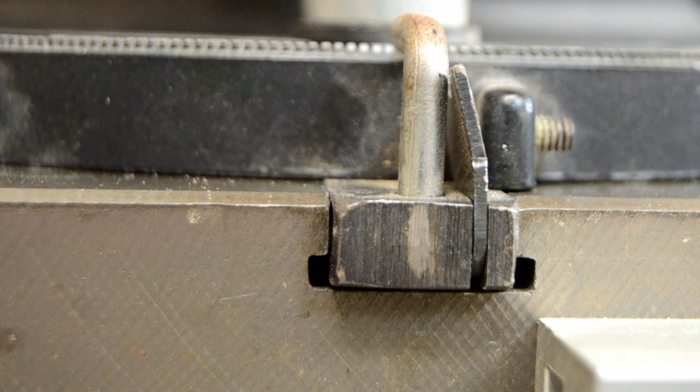Factory, aftermarket, or shop made, if your miter bar doesn't fit the slot properly, you simply can't get accurate results.

Much of the work here is going to be done on the bar, so the miter gauge has to be disassembled first. The locking handle is removed by simply unscrewing it completely, and then the T-slot retaining washer removed if your miter gauge has one.

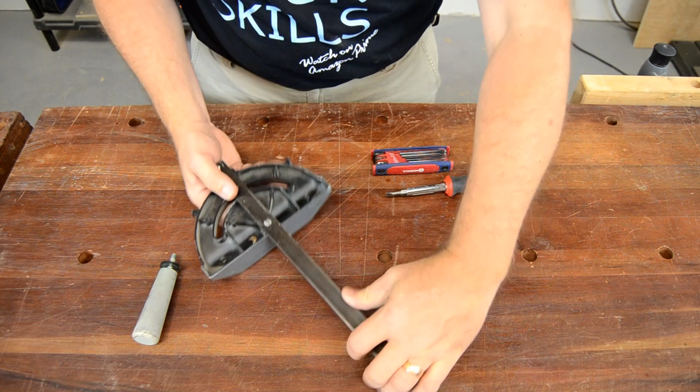Most gauges have some sort of flip stop for the preset angle cuts and a pointer to indicate the angle. They both need to be removed, and on mine, this is a single set screw for both.

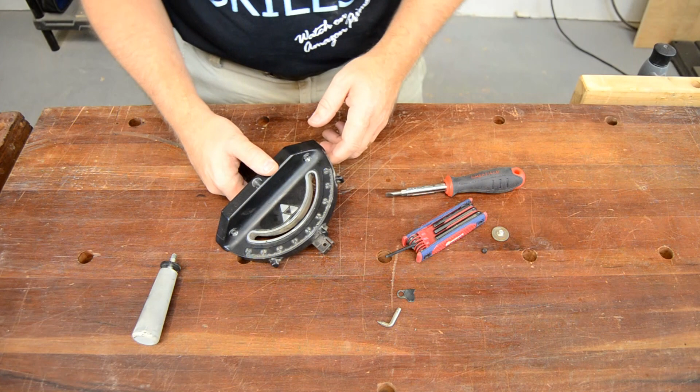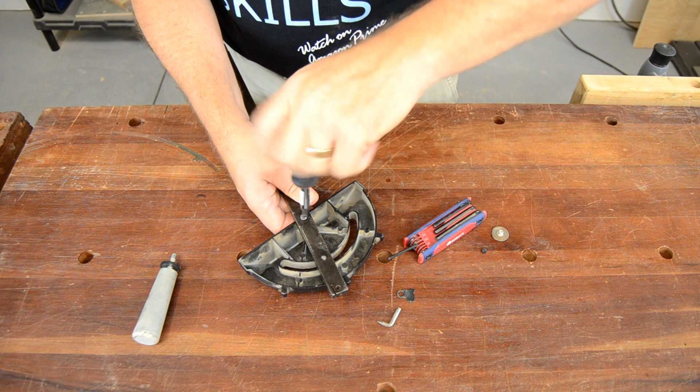The head of the miter gauge can now be removed. A shoulder bolt mounted to the bar acts as both the pivot point and to hold the head in place. But be careful here. Many miter gauges have a set screw in the face of the head to lock this shoulder bolt in place. The set screws used for the 90 and 45-degree presets are removed next.

Now any repairs can be completed. The flip stop for the preset angles usually gets pretty banged up.

I used one of my Bessey C-clamps as a press to flatten it out. And that worked perfectly well.

The bar and the head are both checked for damage. Any burrs or damage are filed out, and all of the parts get a thorough cleaning.

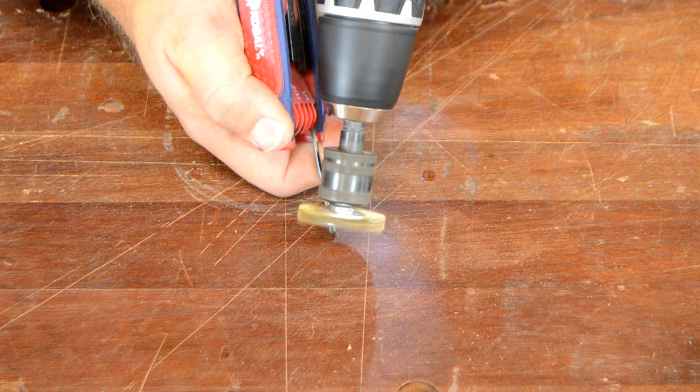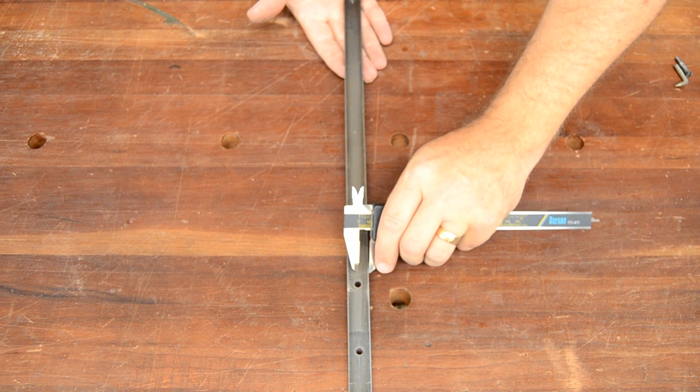The restored miter bar is measured for actual width. Then the caliper is set to exactly half that measurement and used to scribe a line down the center of the bar.

This line is then filled in using paint or a wax pencil, as I'm doing here. Then the surface of the bar is buffed, leaving a sharp, precise, and easily seen line right down the middle of the bar.

Now with our bar cleaned up, the center line marked, and everything still stripped off it, this is the time to adjust the bar to fit the miter slot.

You will see in some magazines and other online sources, they'll use a punch to hammer the edge of the bar to leave a little divot that can then be filed down until it fits. I don't like the idea of altering my bar, and then as that wears, and it will, you're going to have to keep doing it over and over again.

It's really not a permanent solution. So what we're going to do is actually drill through the bar and use some nylon set screws to adjust the width of the overall bar until we get a perfect fit in our miter slot.

For less than $30, I was able to buy a 10-32 tap, the proper drill bit that goes with that tap. They are matched, so you want to make sure you get the right size, and some nylon set screws, also 10-32. These are a little bit harder to find than metal set screws, but I do prefer them because they're less likely to scratch up the shoulders of my miter slot.

As they wear, and they will wear first, which is what we want, we can just readjust them. Now, we're going to drill all the way through the bar and tap all the way through the bar. This is a mild steel bar, so that's just fine. We can do that. But that allows me to use the set screws in the bar, reach in from the other side with an Allen wrench to adjust and not damage the Allen screw opening.

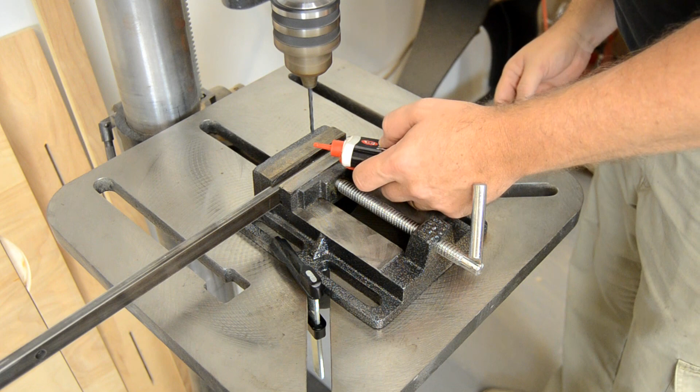Through holes are drilled first, and it's important that they're perpendicular to the bar. Ensure that your drill press table is set up properly. A drill press vise, like the Bessey unit I'm using here, is a big help. The bar will drill pretty easily, but take your time and let the bit do the work.

Clear the hole regularly to remove chips, and a few drops of oil in the hole will keep things lubricated and greatly extend your bit life.

Three holes should be drilled, one toward the front, one in the middle, and one toward the back. The exact locations are not really important. Just make sure that your new holes don't interfere with any of the existing holes in your miter bar. You do need to be a bit careful working around the chips and curls that come off of the bit. They are sharp.

Countersinking the holes will remove any burrs and make starting the tap a little bit easier.

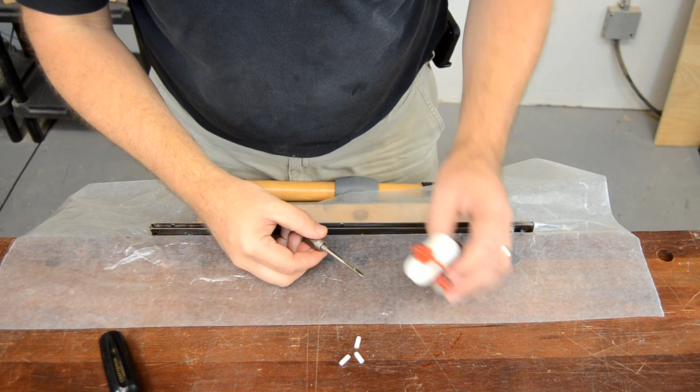The tap is mounted into a tap handle and a little bit of oil applied to the threads. The end of the tap is tapered to start cutting the threads gradually. Set the tap by hand, making sure that it's aligned with the hole.

Then gently turn the tap with a rod through the tap handle. The handle comes with a rod, but mine is missing, so I'm using a screwdriver. The tap is made from hardened steel, so it's hard enough to cut threads in the mild steel, but it's also brittle. Working it carefully will cut good threads without breaking the tap.

The proper technique is to turn the handle until the tap starts to bind. Then turn it backwards a partial revolution and reverse again to go back to cutting threads. And then, every several revolutions, back the tap out completely and clear the threads. Just take your time, keep things lubricated, and don't rush the process, and you'll get great results.

With the holes threaded, the set screws can be inserted. Thread them in until they're inside the bar. They'll be adjusted later.

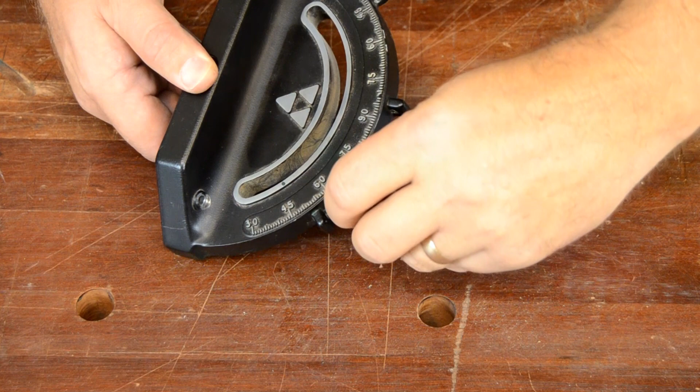The protractor head is reinstalled on the bar, and all of the other components added as well. Add the angle pointer, but don't lock it in place yet. The protractor head, pointer, flip stop, and the 3 set screws for the preset angles are all now installed.

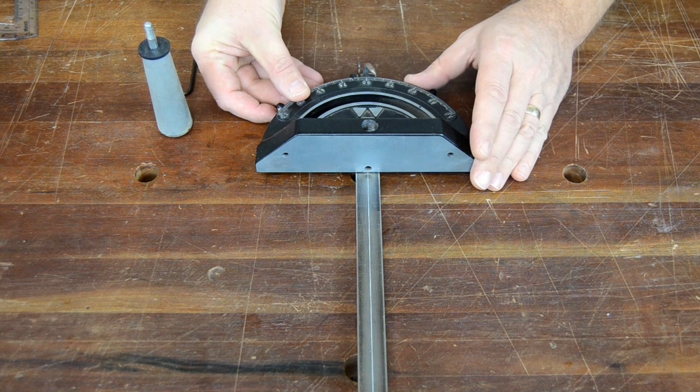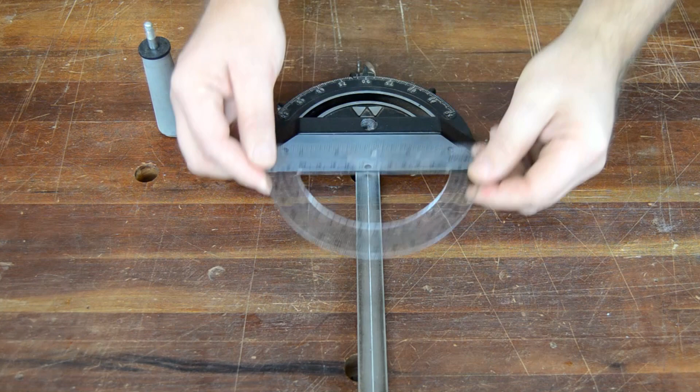But they have to be calibrated, and that's one of the reasons this line was established on the bar. A simple, clear plastic protractor from the office supply store can be lined up on the head and then adjusted until the center point on the flat bar is against the head and the white line is in the middle of that indicator.

Then the head can be adjusted until the 90-degree mark up here aligns with that line as well. Now the head is at 90 degrees to the bar. The handle can then be reset in place, locking the bar in.

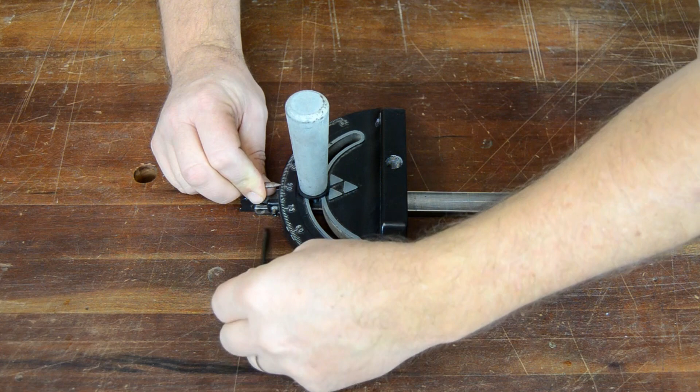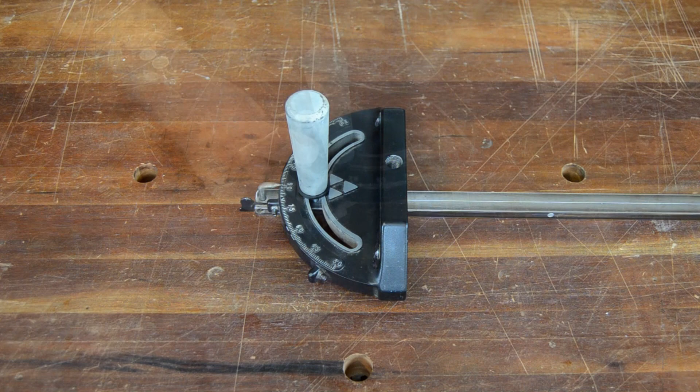The pointer is now adjusted to the scale on the protractor head and locked in place. And while it's at 90 degrees, the flip stop can be put into position.

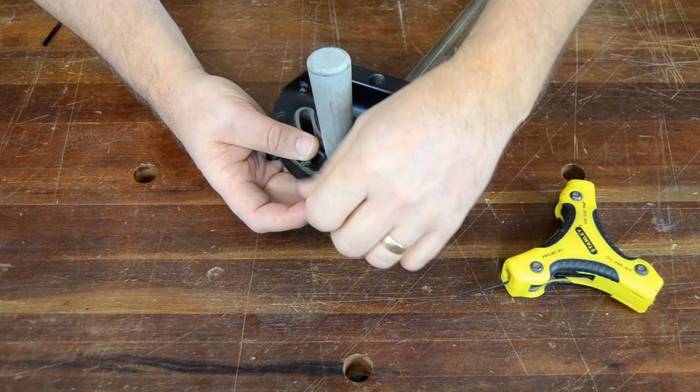And the set screw adjusted so that it's just touching the flip stop. It'll take a little bit of adjustment here to get it to the point where when you bring the head back to 90, it meets, but it's worth doing.

Once set up and calibrated, the flip stop is moved into position, the head brought back to the 90 position, when the two touch, and this can be verified using our protractor, and that looks good. So now it's really easy to return this protractor head back to 90 after making an angled cut.

And the stops for the 45-degree angles are done the same way. Using the protractor and the scribed line on the bar to set the 45, lock it in place, and then adjust the set screw.

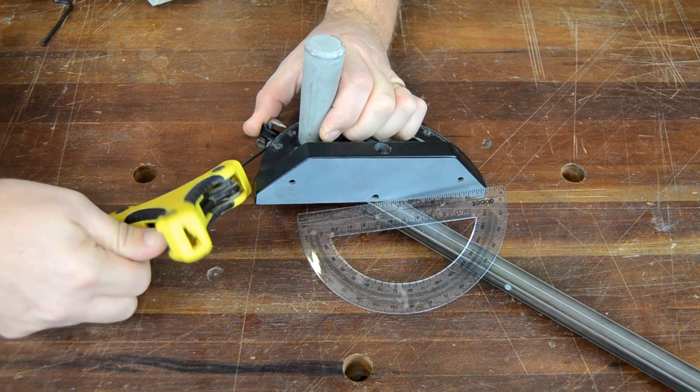The set screws are now adjusted to fit the bar to the miter slot. Adjust the set screws in sequence, front to back, so that each slides easily within the miter slot without any side-to-side play.

Your miter bar is now clean, tuned, and adjusted to provide accurate results.

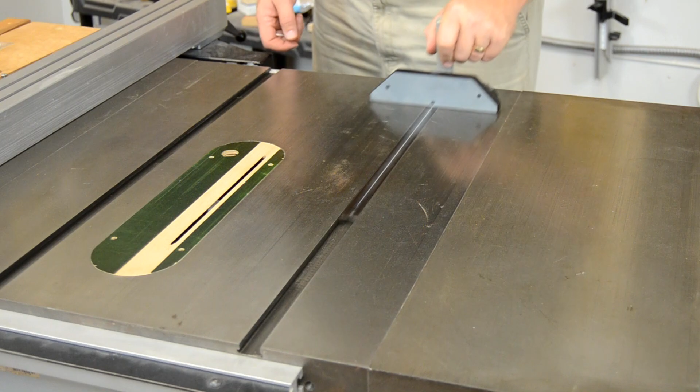The only thing your miter gauge lacks is a good auxiliary fence, and this one ticks all the boxes. It can slide back and forth to be set wherever needed, tight up against the blade, even during angle cuts, or crossing over the blade to back up your cuts to give a better finish.

It has a T-slot across the top, so a flip stop can be added anywhere along its length, and it features an extending end that can slide in and out to allow you to do repetitive cuts for longer pieces.

And this fence is not nearly as difficult to build as it might appear. The T-slot across the top and the holes that run all the way along the length of the fence that the rods will run in for the extension are easy to do because the fence is made of 2 pieces of plywood milled to the proper shape and then glued together to include those details.

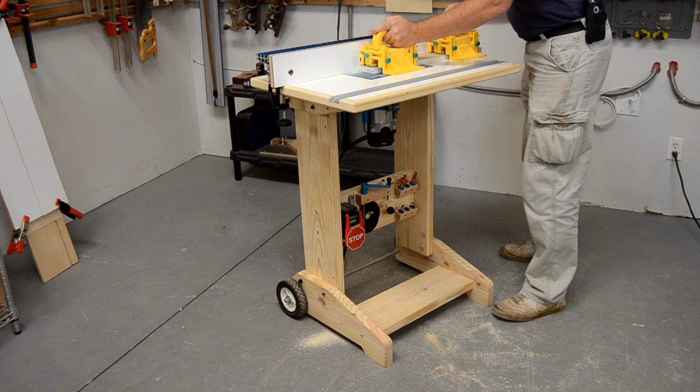Start by ripping 2 sections of good quality 3/4 plywood. They should be about 3 inches wide, and the length can be whatever makes sense for your saw. The inside faces of these 2 pieces get milled on the router table with a 3/8 inch diameter round nose bit.

Check the fit as you go by clamping the 2 rods between the fence pieces, adjusting the milling setup as needed until the rods slide freely within the grooves.

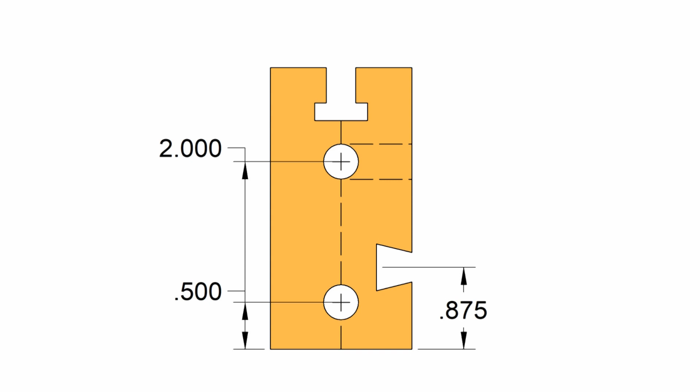The measured drawings in the plans for this project were based on this particular miter gauge. The miter gauge on your saw may require adjusting some of these dimensions.

There are a number of ways for adding the T-slot to the top of the fence, but since we're gluing the fence up from 2 pieces, it can be done quickly and efficiently at the table saw. 2 passes across each face forms the T, and the channel of the slot is created with a vertical cut down each face.

The two pieces of the fence are now glued together. The glue is applied sparingly since there's a lot of surface area here. The trick is to keep the glue out of the channels.

The aluminum rods are replaced in the channels before the faces are assembled. They will keep everything accurately aligned while the parts are glued together. Double check to ensure everything is aligned and moving freely, then fully clamp everything securely while the glue cures.

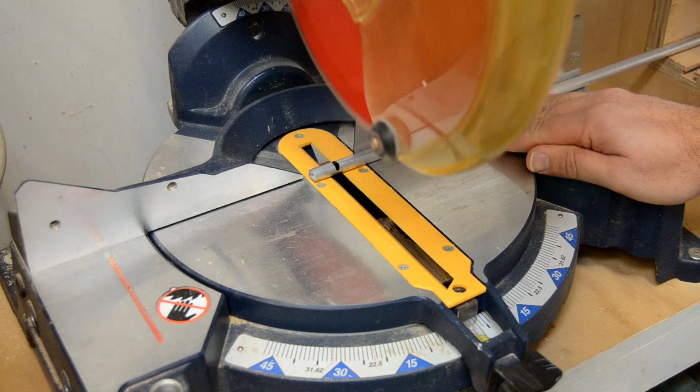Next, the aluminum rods are removed, the ends of the fence are trimmed, and a 4-inch section is cut off one end to serve as the extension block. The aluminum rods are marked to 1 inch less than the overall fence length and can be easily cut at either the table saw or the miter saw.

Rough sand about 4 inches at the end of each of the rods. Then they're epoxied into the extension block. The fully mixed epoxy is added to the holes and spread as evenly as possible.

The bottom of an empty soda can is excellent for mixing up a small amount of epoxy like this. Excess epoxy is wiped away, and the rods inserted into the holes.

Turning the rods as they're fed into the holes helps to ensure complete glue coverage between the rods and the block. Work the rod all the way through the extension block, wipe off any excess epoxy, and then flush the ends together. Set the entire assembly on a piece of wax paper until the epoxy is fully cured.

Epoxy should be more than enough by itself to keep the rods in the extension block. But just to be safe, they can be pinned in place by driving a brad through a small pilot hole drilled through the block, through the rod, and then into the other side of the block.

The fence attaches to the miter gauge using these dovetail hardware pieces. These are the studs from Microjig. It's a brand new product, and it really makes this process much simpler.

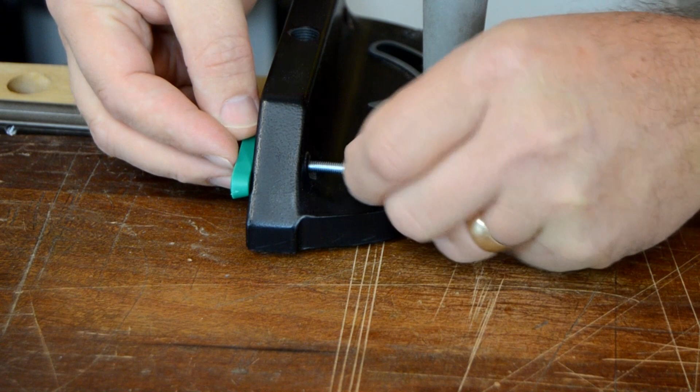This is a 1/2 inch, 14-degree dovetail groove, 3/8 of an inch deep, per Microjig's instructions. The mounting holes on this miter gauge were pretty close to the top of the protractor head, so a nylon spacer was added to provide clearance for the knob that comes with the dovetail hardware.

To complete the fence, a clamp is added to hold the extension in position during use. A 3/8 inch diameter hole was bored into the back of the fence along the line of the top rod. A piece of wooden dowel prevents blowout when the two holes meet.

A brass 1/4-20 threaded insert is mounted in this hole for the 1/4-20 brass thumb screw that will actually lock the rod. The threaded insert has a slot across the top for using a screwdriver.

But a much better method is to put a pair of jam nuts on a 1/4-20 Allen head bolt and use that to drive the insert.

The T-slot across the top is to accept a flip stop. This is Rockler's flip stop. It uses a 1/4-20 T-bolt, which slides right into our groove. This can be positioned anywhere along the fence needed, and then used as needed for repetitive length cuts.

It can also extend out into the extension block where it travels with that for longer cuts. So this gives us maximum flexibility, and it's easy and accurate and not terribly expensive to buy. The factory miter gauge that came with your saw is now a safe and accurate cross-cutting tool.